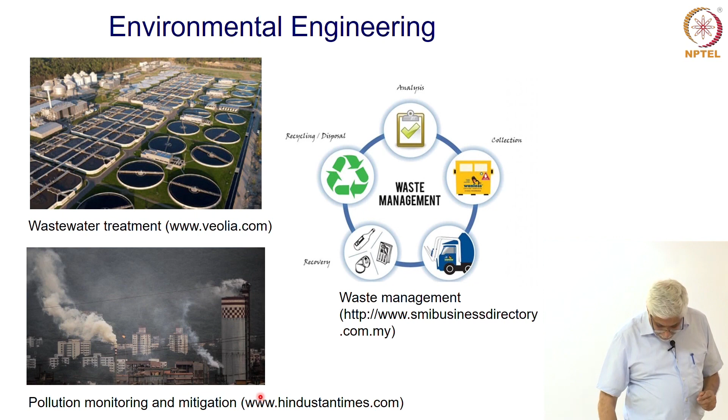So environmental engineering does all this, aiming to protect and improve the natural environment, where we all have to cohabit, work, and live.

It draws upon basic sciences like chemistry, biology, and fluid mechanics, because these are required for designing and operating systems built for providing drinking water and treating waste, both municipal and industrial. Depending on where the waste comes from, the treatment may differ. We have to identify the contaminants and how they can be treated or handled before the treated waste is sent back into the environment.

This also brings up the very importance of a civil engineer knowing chemistry well. A lot of environmental engineering processes draw on chemistry and the understanding of chemistry as much as we are concerned.

The other aspect is monitoring and modeling of the environment. There are many processes that we have to say how they will evolve over time, so modeling is very important. We have to understand the phenomena and see how they will affect the world in future. How much will temperature increase? How much will the carbon dioxide in the air increase? And if so, how are we going to stop it, limit it, and mitigate it?

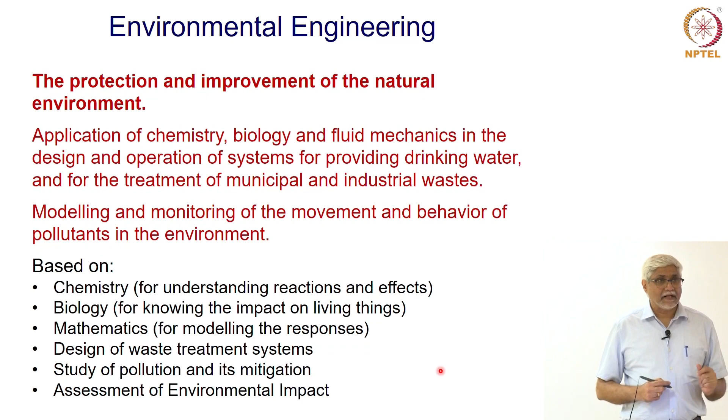The different areas that we have to understand include chemistry - there are reactions, and the effects of these reactions have to be understood. Biology, because we are dealing with not only human beings but many other living things on the earth along with us. Mathematics is needed for the modeling - we need sophisticated models sometimes, which depend on many aspects of the environment, to tell us how the pollutants will change, spread, and how pollution will increase, for example.

And that will lead us to the design, for example, of wastewater treatment plants. For that, we will have to know where it is going to be situated, what waste is coming in, how the population producing this waste is going to change with time, and therefore what would be the adequate design for the wastewater treatment.

I have already talked about pollution and its mitigation, and finally, an important aspect of design of almost everything that is large is the environmental impact assessment. When we have a large project, say a new township, a dam, or a canal coming up, it is now almost necessary to have what is called an environmental impact assessment. How is this going to affect the environment in general? What are going to be the emissions? What resources are going to be needed? And how will this change the environment where this is coming up? So this is again something that environmental engineers do.

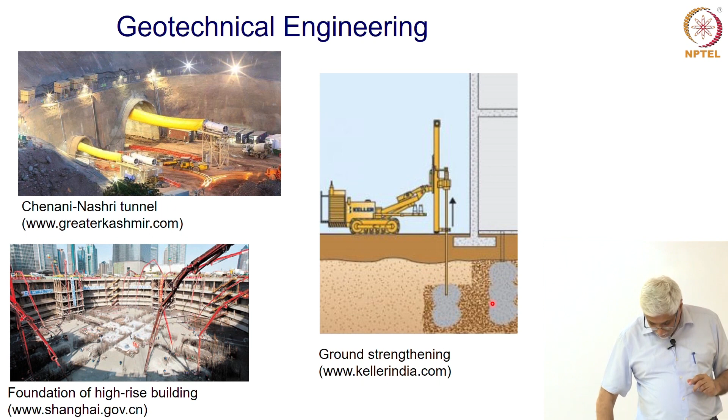Geotechnical engineers understand earth materials, whatever is in the ground, and see how to design safe foundations for structures that we are going to place on them or within them. So they analyze the behavior of soil and rock so that they can design these structures safely.

The structures could be high-rise buildings, pavements, underground facilities. We talked about tunnels. In India, almost all the major cities are having metro tunnels, and surely we will have these projects running for several decades in India and other parts of the world. These are structures which are mostly or at least partially under the ground. We have to make sure that the drilling process and excavation is done safely, economically, and the structure once constructed is safe enough for transportation to occur through it. So underground structures are becoming more and more important.

We also need underground structures for containment of waste. Suppose we have radioactive waste, we have to store it safely. We cannot have leakages, we cannot afford to have this waste escape into the environment. So we need containment vessels, containment structures that will keep contaminated waste, or waste that could contaminate, in a protected place.

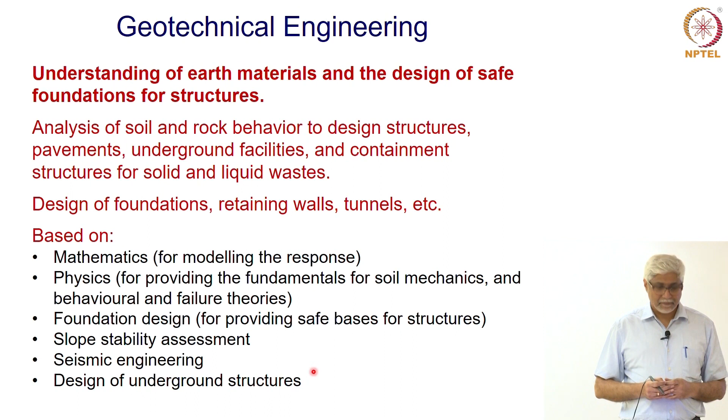Another aspect which deals with the ground is how water flows on the ground, hydraulics and water resource engineering. There are large structures like dams that have been built over the course of history. We still build large projects involving dams, where water is stored for irrigation, drinking water purposes, and also to generate electricity. It is one of the cleanest ways to generate electricity. We have several large hydroelectric projects which use the pressure due to the buildup of water to generate electricity.

These are all massive projects because they involve making a huge reservoir that can collect the water, and the impact on the environment and on people is tremendous. So they have to be done properly and safely.

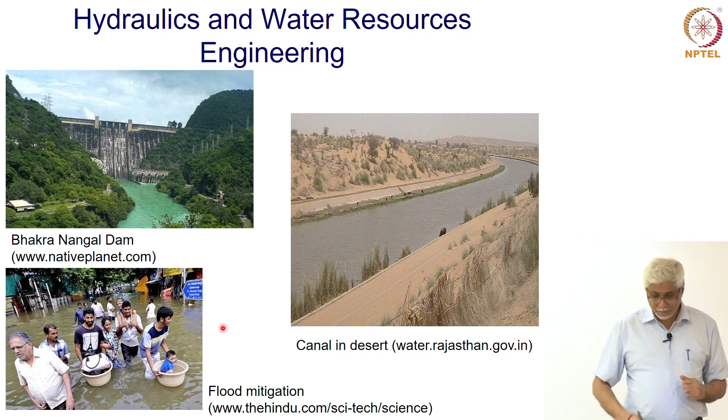So there is a lot involved in storing and conveying water. On the other hand, we are also worried about protecting too much water from coming into the city and destroying the city and its people. So the hydraulics and water resources engineers apply analytical methods, computers, and fluid mechanics to the study of the flow of water and controlling this water, so that we use it when we need it and it does not harm us during its flow.

So flow and control is important, and we collect water, like dams, as I said, is a way of collecting water. We can have tanks and other facilities, and then supply this water where it is required, and this same can be extended to other liquids. There are civil engineers who work on the flow of blood in the body, because it is also a fluid. So there are many fluids other than water where these principles of hydraulics can be used, and civil engineers also work in these areas.

They mainly do the design of hydraulic structures and machinery required for controlling water and moving water. They spend a lot of time studying rainfall, especially in a country like India, where we have many areas without water readily available. So we have to study when we will get rain, how much rain, and how we are going to store and use it properly, so that we can control its flow, decide the flow and collect it.

Disasters happen and a lot of it is because of storms and floods. There are many hydraulics engineers who study storms, see how they move, and even predict and warn people that there is a storm approaching, that there could be a flood. So even though we have designed well, there could be something beyond our control. So we can warn people that a storm is coming, we have to evacuate, we have to be safe, we have to move to higher ground so that they are not affected by floods.

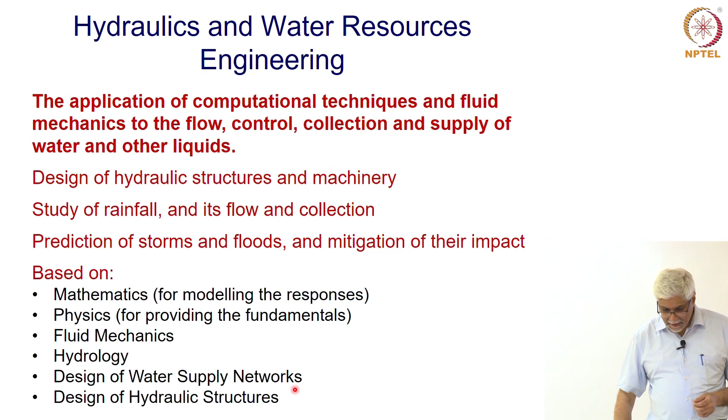So these are the different areas that hydraulics engineers work on. Next we would come to the area of construction.

Construction involves resources, materials, and processes. The people who are involved with construction materials have to decide what material to use, how much to use, and how to use it.

So construction materials expert has to know which concrete to use, how much should be delivered, how it should be delivered, and the construction technologist has to see what equipment is required so that this material will be delivered correctly and on time.

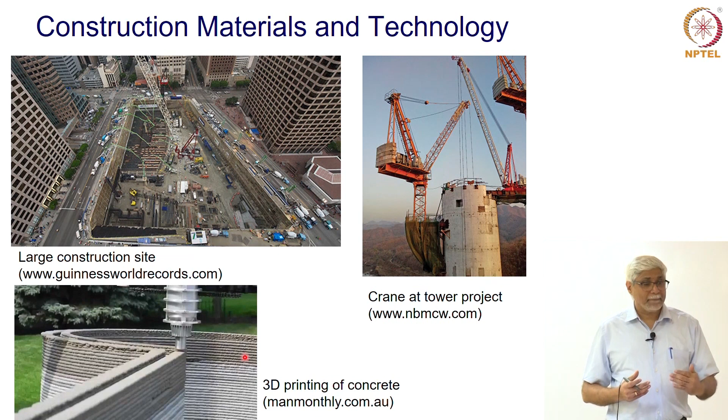The engineer who works on construction materials and technology looks at the utilization of the material and equipment to implement the design. The design is given, now how best to implement it and make it happen. These could be structures or any other civil engineering project.

They also have to take care of the maintenance. Structures become old, facilities become old. How do we make sure that they are in running condition and usable condition? When do we have to repair, and how do we repair these structures?

Design of new materials is very, very important. Just like our demands and requirements keep changing, we have to supply and come up with new materials. So these engineers will look at new materials, construction methods, how to improve the performance of the material. If we know something is going wrong with a certain type of material, how can we make that better?

Quality of construction - we always hear a lot of complaints about construction not being good quality. So there are people who are supposed to work on that and make sure this quality is improving. They draw on physics and chemistry to understand the behavior of materials, and they understand what is there in the market, because in civil engineering you cannot use something very expensive that has to be brought from a long distance, because it makes the construction not feasible.

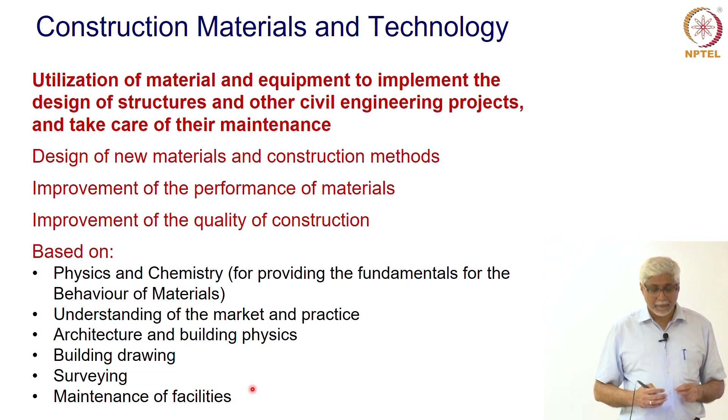Then we come to the structure. We have looked at the people who take care of the foundation, the material and the process. Now we have to design a structure like this high-rise building in Mumbai, or this bridge across the Yamuna river. This is a cable-stayed bridge where you have a deck over which the traffic is flowing, but the deck has to be kept across the river, and you have cables holding it up. These cables are tied to this huge tower above the bridge.

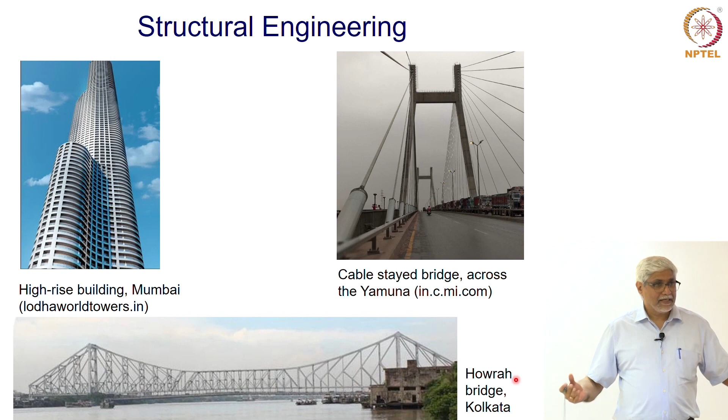You can have a steel bridge as well. This is a very elegant Howrah bridge in Kolkata, which shows the entire steel bridge and its skeleton, or the structure of steel that is holding it up. These are things which are very impressive. They could be tens, if not hundreds of meters tall or long, and they have to be designed in a safe way and to last for a long time.

So this is what the structural engineer does. The structural engineer analyzes the forces, stresses and deformations, and designs the structure so that it will resist the loads and any other action. The loads that come because of people using it, the weight of the materials, movements due to wind or seismic action, and still last for a long time.

And when they last, we want to make sure it's functional. What do we mean by functional? It should be fit for use. If there is a bridge but it has deflected a lot, or as the car is moving across it, it moves a meter, it may not break, but it is not functional. Similarly, if you sit in a building and for the least wind you can have, it moves a lot, nobody is going to use the building. It may not fail, it will be safe, but it's not functional. So functionality is very important, and later on when you study more courses in civil engineering, you will hear this concept of serviceability, that it should be good for service, good for use.

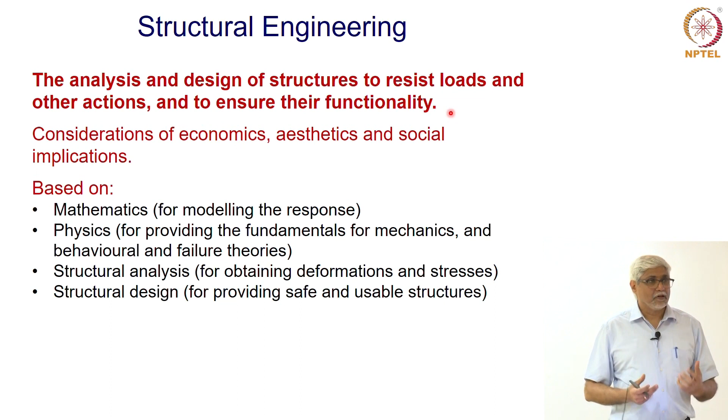Obviously, all this has to be done within certain constraints of cost. It should look good, like the pictures I have shown you, showing the elegance that can be brought out in a well-designed structure. And the social implications like ease of use, comfort, people should feel nice about the structures that they live in and work in.

So this again depends on the knowledge of mathematics to model the response of these structures. Physics is very important for understanding the fundamentals of mechanics and the theories of failure and behavior. This leads on to structural analysis, which looks at deformations and stresses for given loads, and this is followed by structural design, where the concept is taken, the idea is taken, functionality is built in, and translated to something that will go to construction for the construction manager to start executing.

Transportation, as we all know, is very important. We use different modes of transport. Here we have some networks that I have shown. This is the expected national highway network of India, where several thousands of kilometers still have to be built to create this grid that connects different corners of India.

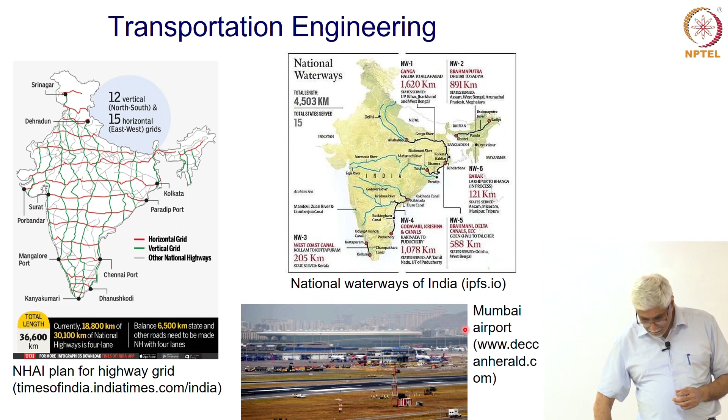So the transportation engineer takes charge of planning, designing, managing all the systems used for moving people and goods. They complete the cycle of planning, constructing, designing and managing. So they analyze the movement of people and goods, make projections for the future, because population is increasing and we know cities are going to become denser. So how should our system also evolve?

They design traffic management systems, and anyone in India would appreciate how complicated it is to design and plan something for an Indian city to manage traffic properly. So they again rely on mathematics skills for modeling traffic flow. They also need to understand physics and chemistry to understand the behavior of materials used, and which material to use where. Should a pavement be asphalt or cement concrete? These are questions that require understanding of physics and chemistry.

Computational skills are very important. We have transportation engineers who are always looking at computational models to predict how traffic will change and evolve, and how to manage it efficiently so people don't waste time in transport.

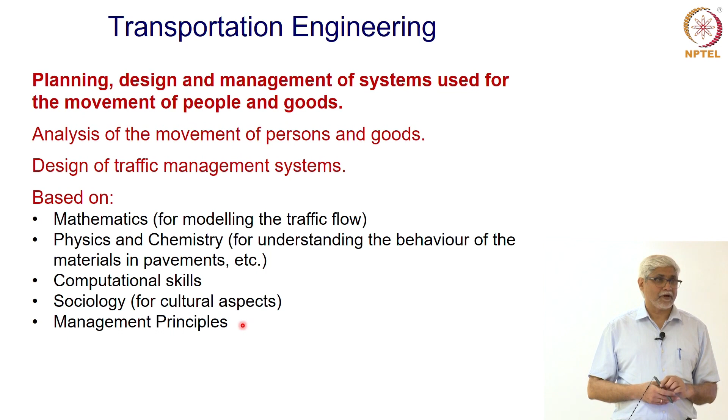Social aspects are important too. Will people use one mode of transport or not? When will people stop using bikes and start using a car? Will they use an auto rickshaw or go by bus? How can we make them use more mass or public transport instead of their own car? These are sociological aspects that must be studied, along with management principles, since a lot of these projects are huge. You have to manage money, plan properly, and decide the policy and priority for construction of such systems.

There are new modes of construction management. For example, what is called public-private partnership, where if you have a public facility, not all the money comes from the government alone. The government partners with a private group, which also puts in some money and charges users, and that way finances the project. These are called PPP, or public-private partnerships.

You must have seen many cases, like highways with a toll booth. They collect money from you for using the road, and that money pays back what was spent on construction. Possibly once they've collected all the money, it becomes free for other users. So there are several models, but construction managers look into them and decide which is best for managing such projects.

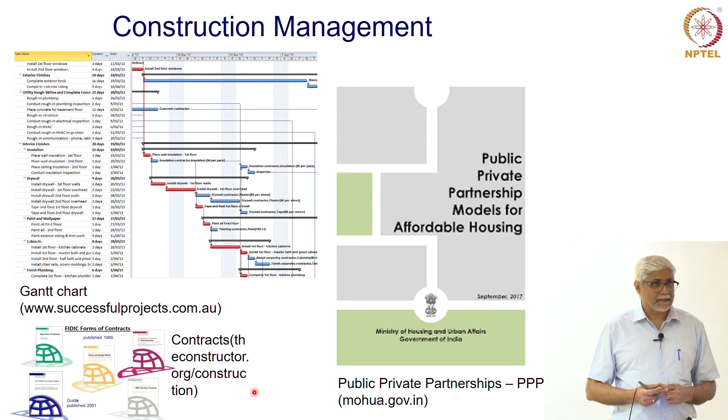Contracts are very important. A contract is an agreement between the different parties in a construction project - the owner, the contractor, and the bodies administering it. There's an agreement saying that for a certain amount of money, they will do the work in a certain way, complying with the rules and specifications. So how to write contracts, and how to deal with contracts that go wrong - there will always be problems, there will always be something that goes wrong. How do you deal with it? These are things construction managers handle.

They plan, coordinate, and control all civil engineering projects, and also look at equipment requirements. They design formwork - where concrete is poured so it takes the shape you want in the structure - and scaffolding, which is the supporting part. If you've visited a construction site, you'll see poles holding up wooden elements where concrete is poured, keeping it in place until it becomes strong enough. So scaffolding is anything that supports something, including people working at the site.

Other construction equipment includes cranes and excavators - a lot of equipment is now required on a construction site. Robotics are becoming very important too. You can automate things and don't need people all the time to construct. You can have sophisticated equipment controlled remotely by just a few people instead of many laborers at the site. Very importantly, a good construction manager should be able to manage time, money, and other resources, and deliver a construction site without delay.

They should make sure the site is safe and manage everything - labor requirements, money, and time - to deliver good quality without safety problems. So again, modeling is very important, and maths is important.

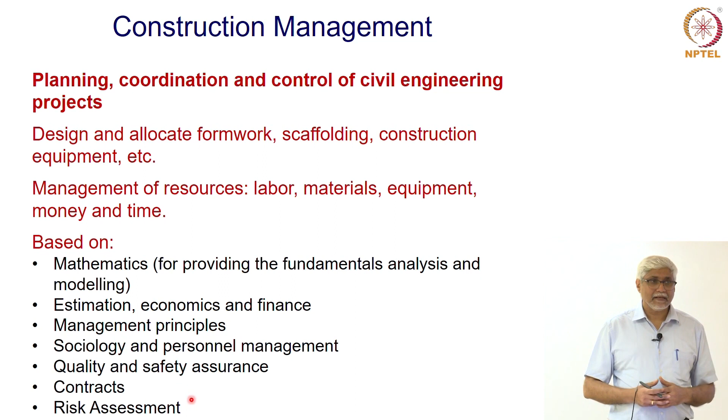And a risk has to be assessed. Suppose there is an exceptionally heavy rainfall, will the project get delayed, and if so, what do we do? If there is a strike, what do we do? So there are many risks associated with construction management, which a construction manager has to take into account.

The last specialization I want to talk about is urban planning. Urban planners decide how a city will grow. They coordinate how a built environment will develop, how new cities will develop, how cities will transform with time. They look at road networks, where green areas should be, where parks and recreation areas should be, and how should be the combination of residential, commercial and industrial spaces.

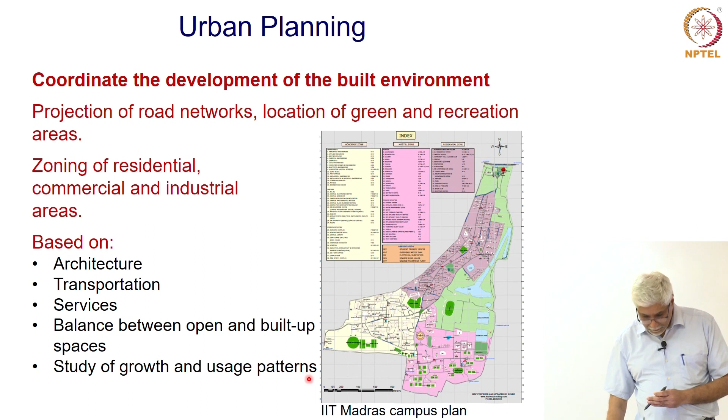So civil engineering comes with a lot of responsibility. There's nothing like a small mistake. Whatever mistakes you make have a huge impact. The responsibility of the civil engineer is very high. So that is why we are always very careful, because if you make a mistake, it could have a huge impact and there's no getting back.

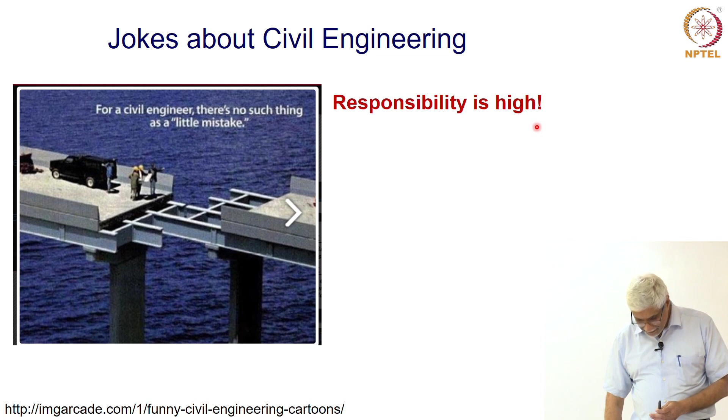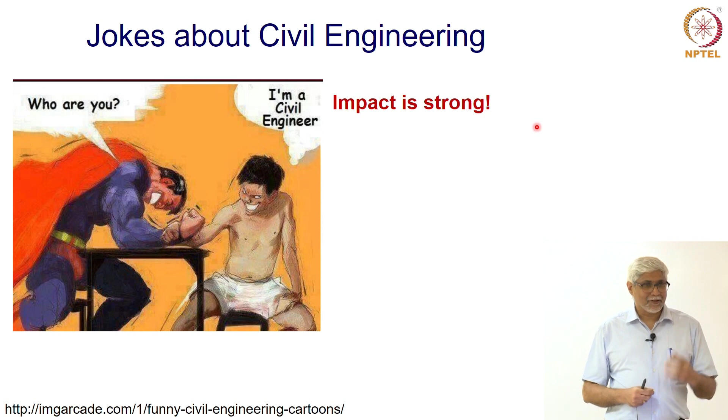So the impact is very strong. Here you have Superman trying to arm wrestle a civil engineer who doesn't look very strong, but he has so much in him that he has that impact which is possible. Civil engineers control so many things. If they do something, it has an impact on a lot of things. So the strength is inside, it's inherent to the civil engineer.

This is a wedding procession of two civil engineers getting married. You can see here that they're standing on the excavator, followed by a procession with all their friends in the excavator. So the commitment is there. If you are a civil engineer, you are set all your life to civil engineering, and you can't get out of that mode.

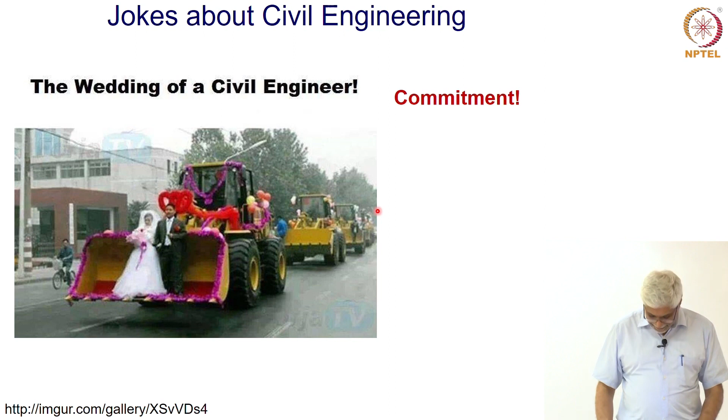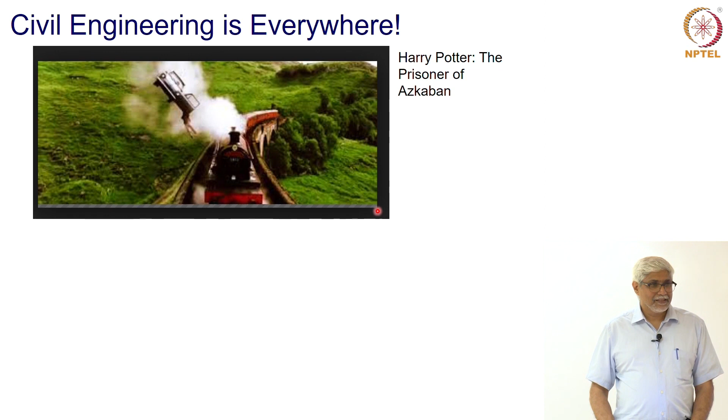Further, civil engineering is everywhere. A lot of you would have seen Harry Potter. This is a shot from The Prisoner of Azkaban, where Harry and his friend Ron are flying with his car, and below them they see this very nice bridge. You might have noticed the car, but you may not have noticed the bridge. This is that bridge, a real bridge in Scotland, built more than 100 years back, 380 meters long. This is the Glenfinnan Viaduct, 21 spans, constructed with mass concrete, no steel, just by the form.

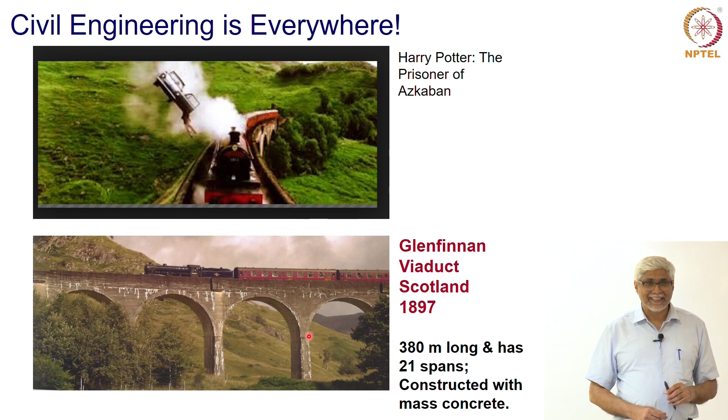We'll talk later about architecture and structural analysis. Just the form was such that it needed no steel, and just the concrete could take all the loads and last for more than 100 years. So you can imagine this was the Hogwarts Express, and it needed this bridge to take Harry Potter and his friends to school. So civil engineering is everywhere.

These type of things challenge you, because it's not normal to think of a concrete that will float. Concrete is supposed to be massive, that will hold a lot of weight. But here, on the contrary, it has to be strong enough that it cannot collapse on water, it should not leak water, and it should be safe for people to travel. So concrete and civil engineering construction can be a lot of fun.

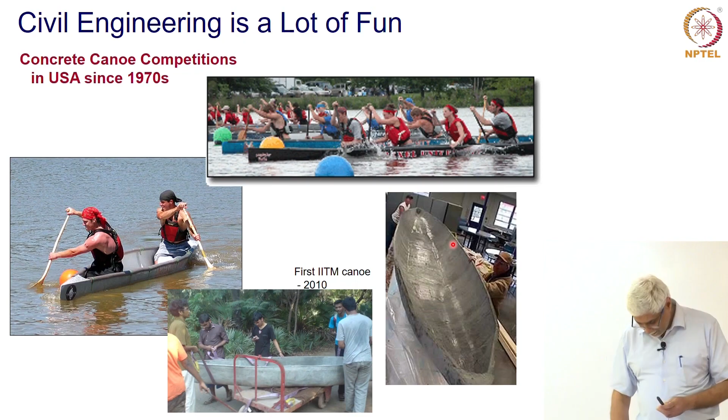I'll stop with that. Thank you very much. The idea was in these two lectures to introduce civil engineering before we get to the different disciplines and talk about each of them in detail. So in the following lectures, we'll have different faculty members of IIT Madras talking about their specialization, so that you would know more about these specializations, what they concern, and see illustrative examples. Thank you.